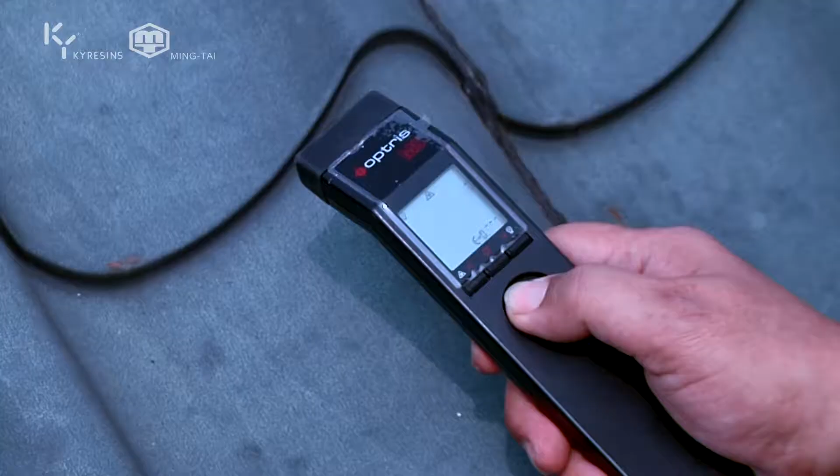Due to the attributes of urban jungles made of concrete and metal, absorbing heat in the day and radiating it at night, room temperatures usually stay high even after sunset. Therefore, city residents rely on air conditioning for a comfortable room temperature, hence the rise in electricity bills.

Moreover, the changes in environmental temperatures also consequently cause building cracks, corrosion, or efflorescence of leaking walls due to thermal contractions and expansions of building material.

Therefore, KY Resins has dedicated more than a decade since the year 2000 to the research of heat insulation paint for energy savings and carbon emissions reductions, and finally developed an environmentally friendly product, the acrylic waterborne resins. The products have been awarded many patents and certified by many countries. Meanwhile, a variety of products such as waterproof, crack-resistant, and heat insulation paint have also been developed with excellent quality that meets the highest environmental protection standards of Europe, the USA, and Japan.

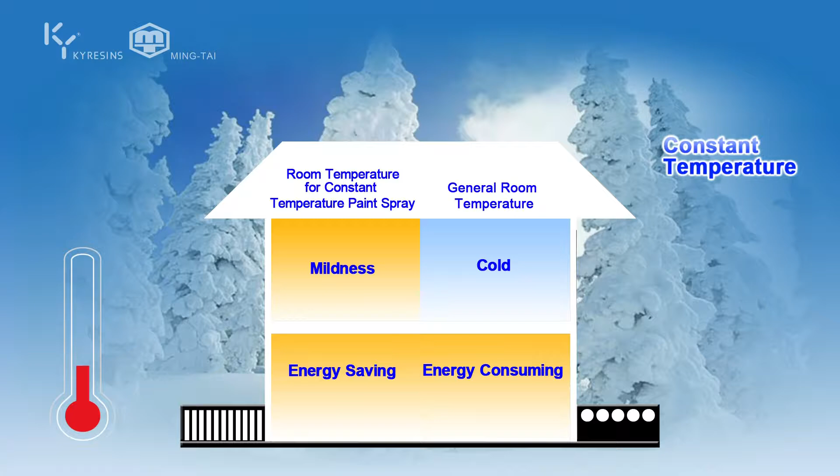KY Patent Constant Temperature Paint provides constructed buildings with protective shields of heat insulation for cooler room temperatures in summer, while warmer ones in winter.

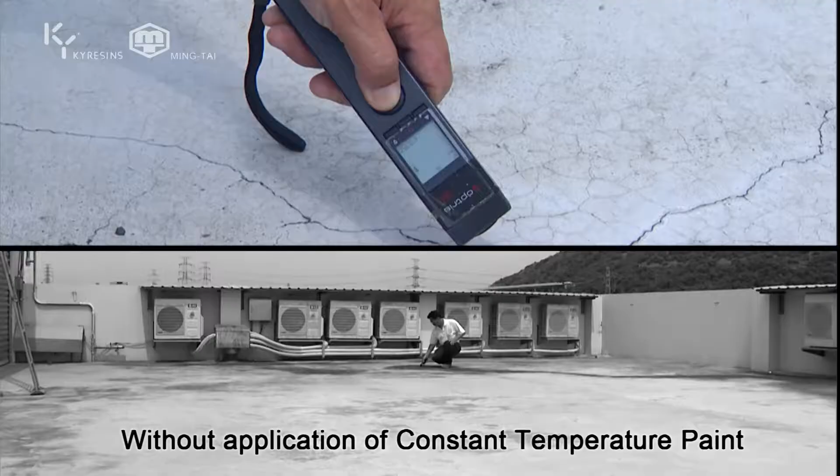For the temperature test under circumstances of ordinary summer afternoons, the temperature of 33 degrees centigrade measured on the coating of KY Patent Constant Temperature paint showed a drop of more than 20 degrees centigrade compared with the high temperature of 60 degrees centigrade before application.

KY crack-resistant waterproof structure system is a safe and reliable solution to the long-lasting problems of water leaking, cracks, and mildew on walls.

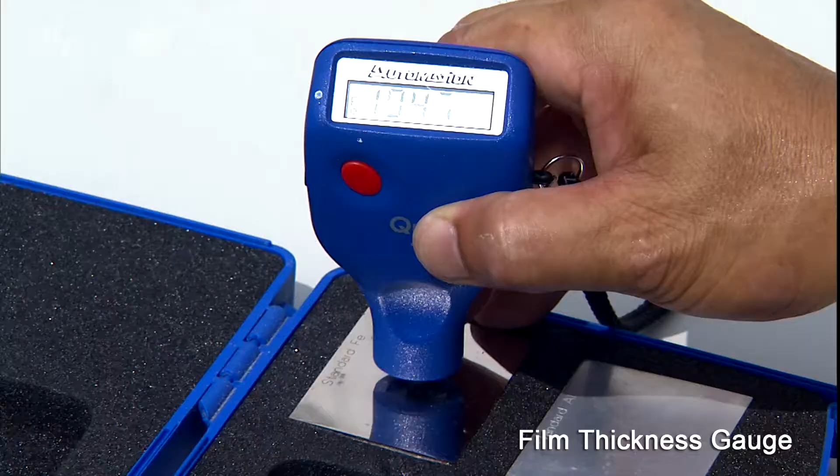KY Metal Constant Temperature Paint Cargo Test. KY Resins Company Limited especially commissioned the Plastic Industry Development Center and SGS for a series of safety tests and inspections on KY Patent Constant Temperature paint to study the effects of constant temperature control as well as energy savings.

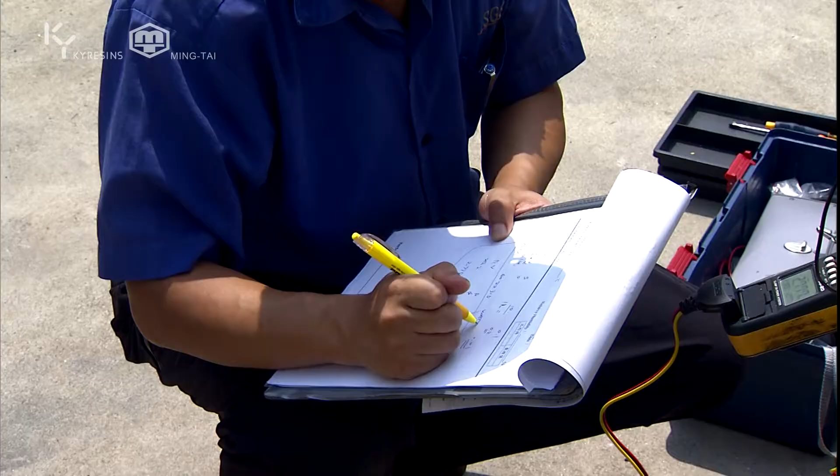Four 20-foot cargo containers were first placed on the concrete ground at the same time and labeled Cargo A, B, C, and D, whereas Cargo A and B were equipped with 4.5T single-split type air conditioners.

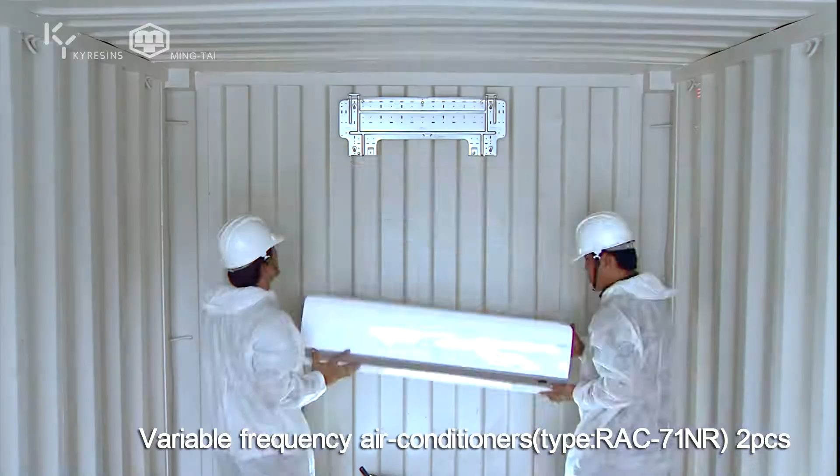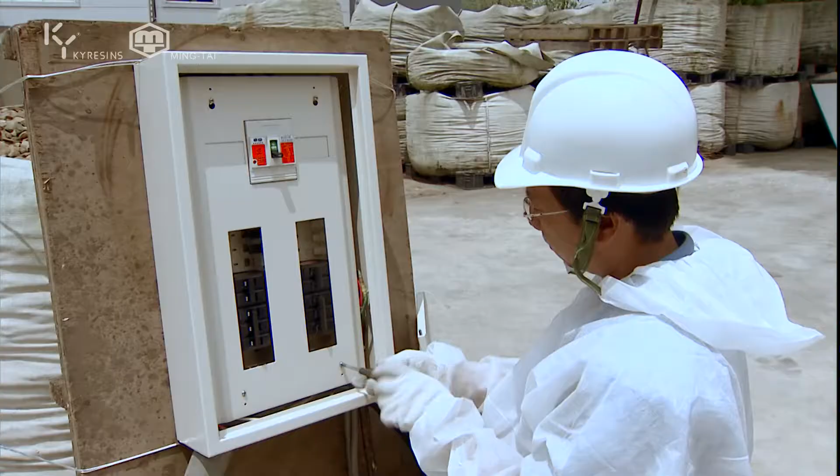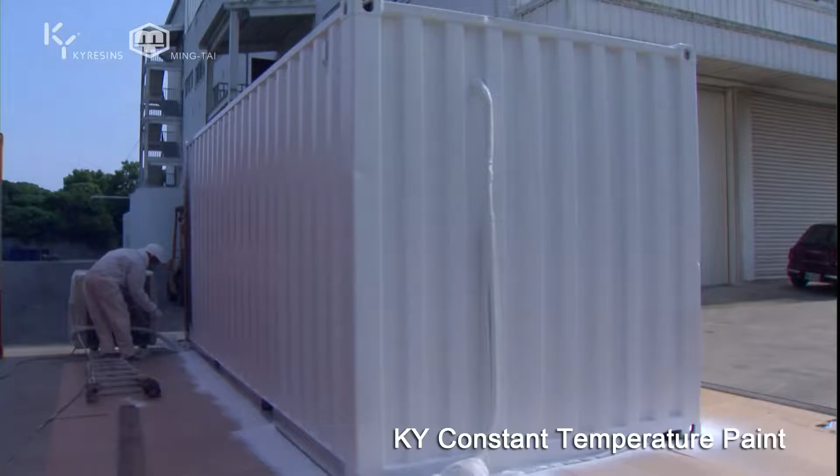KY Patent Constant Temperature paint was later applied on the outer surfaces of Cargo A and C, for tests of temperature and air conditioning power consumption, with corrected multi-point temperature recorders and current recorders during the following month.

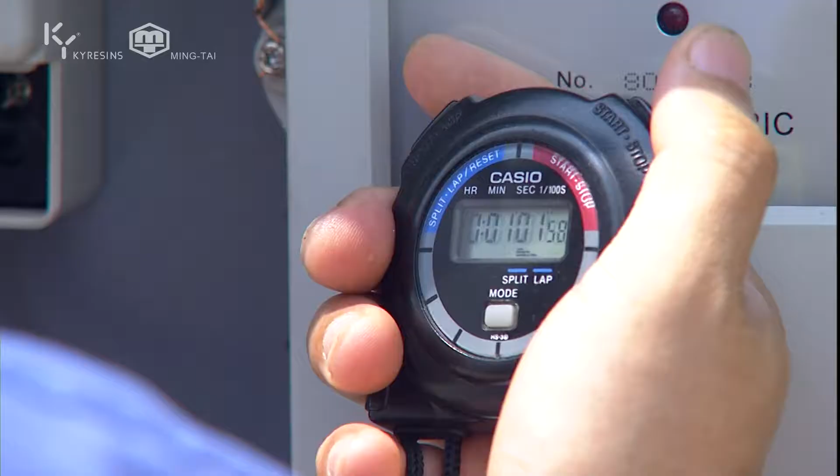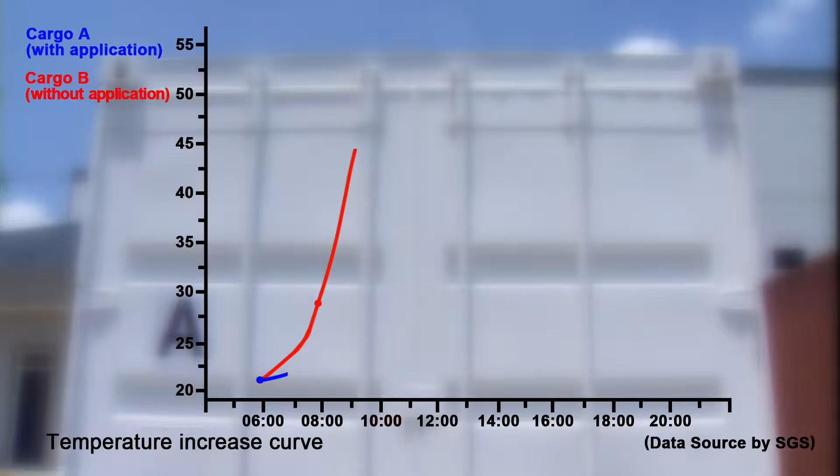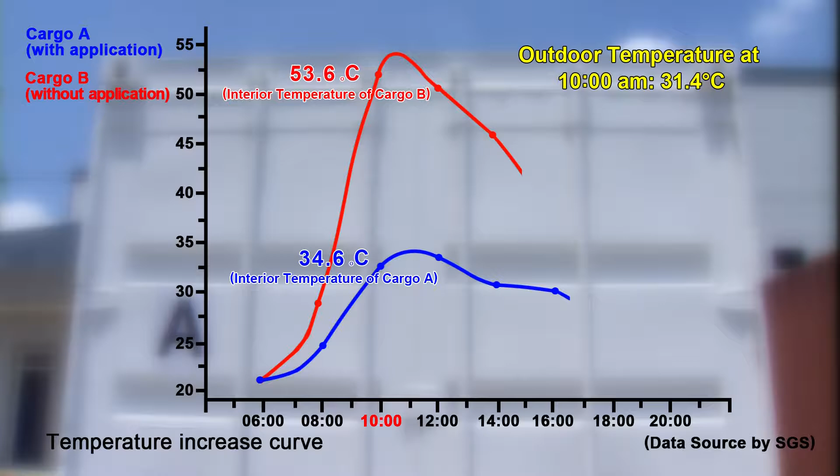According to the experiment, the four cargo containers tended to have equal temperature readings at 6 a.m. before sunrise. However, the interior temperature of Cargo B had reached 53.6 centigrade at 10 a.m., while the outdoor temperature was 31.4 degrees centigrade, whereas Cargo A in the control group revealed a temperature of 34.6 degrees centigrade, with a magnificent difference of 19 degrees centigrade.

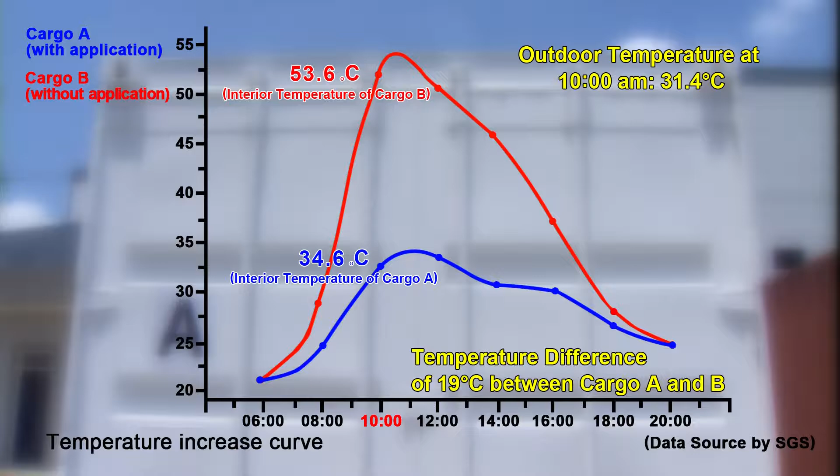At 6 p.m., the interior temperature of Cargo A had come to the same reading as the outdoor temperature, while it was 8 p.m. for Cargo B.

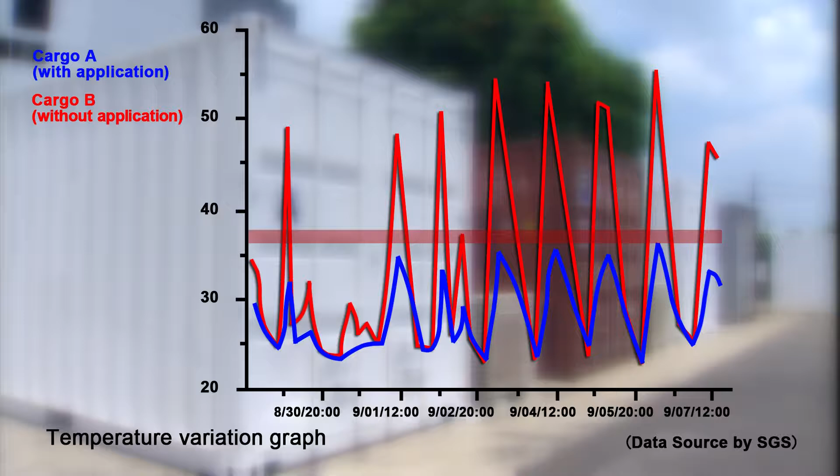Under circumstances of a 9-day temperature observation with no air conditioning, Cargo B without coating appeared to be the one with the most temperature difference of 25 degrees centigrade between day and night, whereas under direct sunlight without any shade, Cargo B without coating tended to have significant temperature differences of 15 to 20 degrees centigrade compared with Cargo A with coatings.

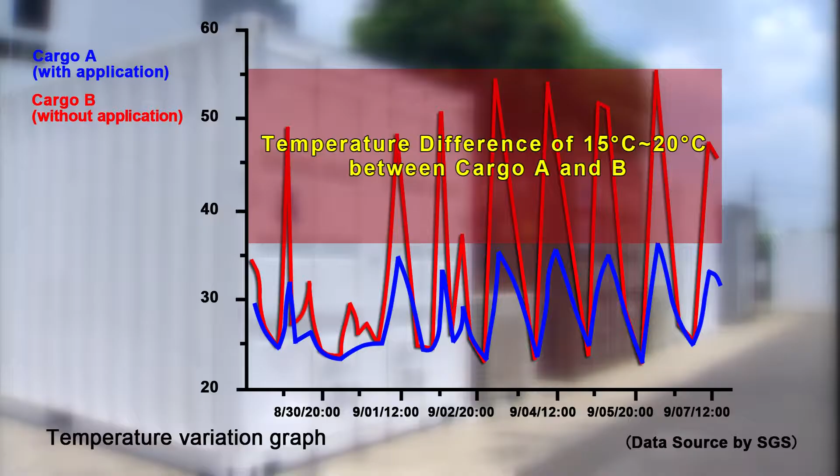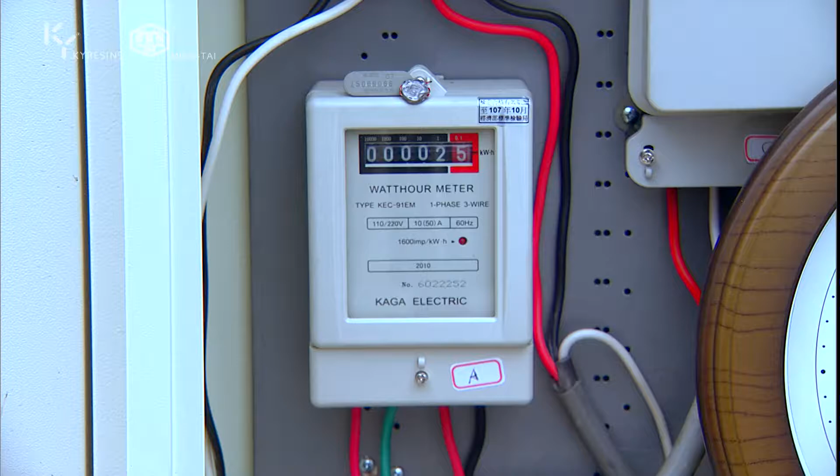Air conditioning power consumption: under the circumstances of a set temperature of 25 degrees Celsius for air conditioning, the start temperature at Cargo A was 2.43 degrees, while Cargo B was 3.64 degrees. There was a variance of 223.3 kilowatt-hours between Cargo A and B for the 21-day accumulated power consumption, equaling 53.1 kilowatt-hours per ping.

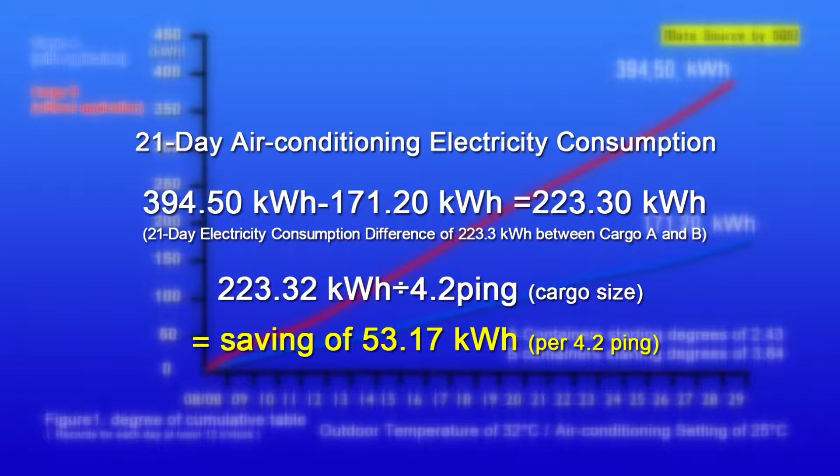The size of one cargo is approximately 4.2 ping. After the calculations, Cargo A with an application of KY patent constant temperature paint had not only enhanced the air conditioning efficiency, but also saved 60% of electricity.

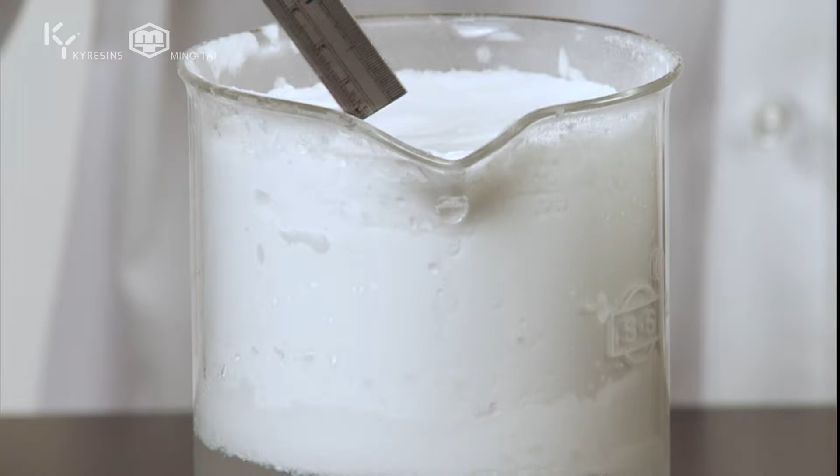The heat insulation effect of our constant temperature paint product largely depends on the insulation material of hollow balls inside, which interact with air. These hollow balls are 30 times lighter than water and weigh almost as little as air.

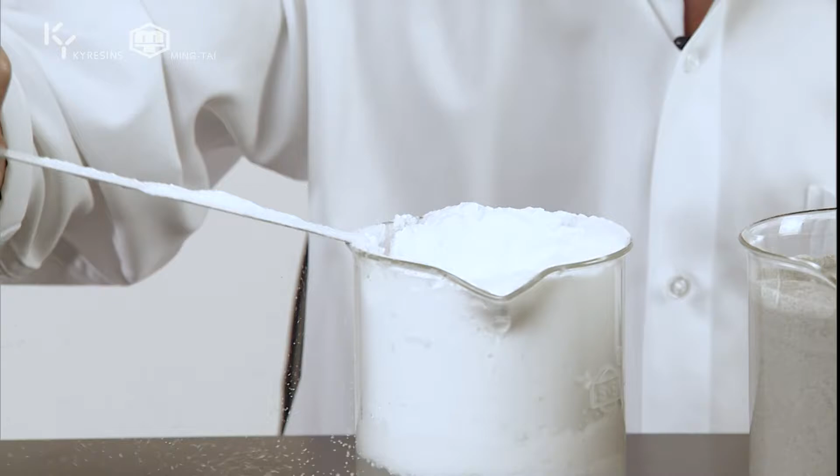Compared with the market-available hollow ceramics that weigh 1/3 of water and are 10 times heavier than our patent hollow balls, the heat insulation effect of our patent hollow balls has achieved a successful temperature drop of 5 degrees centigrade more than hollow ceramics, and 10 degrees centigrade more than pure white paint.

The hollow balls are our key materials for heat insulation, and they are composed of such fine textures that you do not feel anything when touching them.

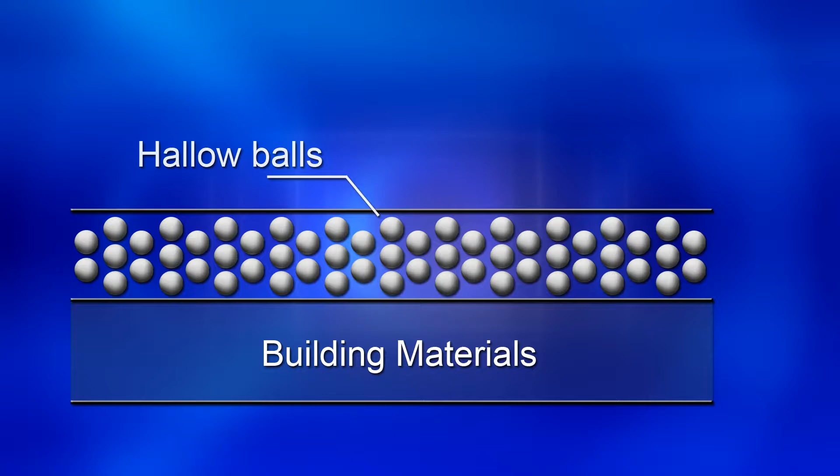KY patent constant temperature paint employs the static air inside the hollow balls for heat insulation, as well as KY patent resins for the best performance of water and weather resistance, in addition to low heat conductivity.

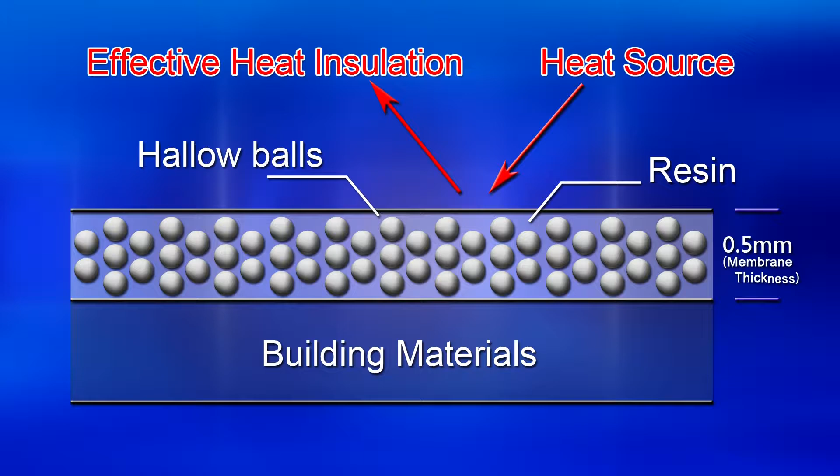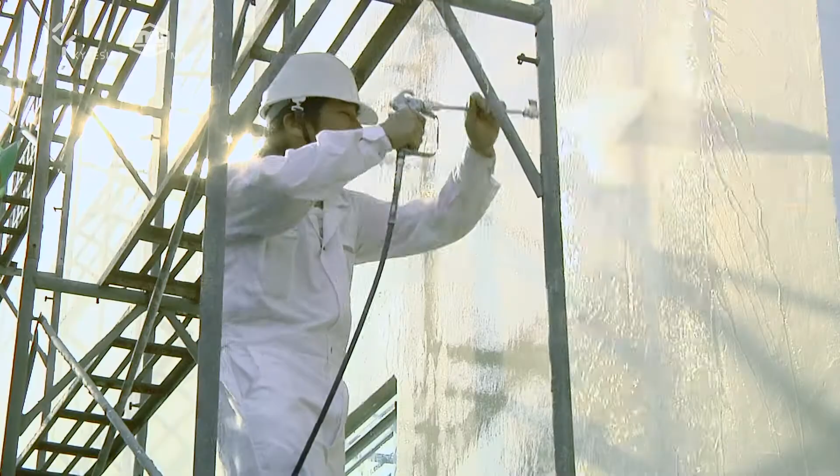Waterproof constant temperature paint for RC roof and wall application instructions. The application of KY constant temperature paint on RC construction is the same as traditional waterproofing construction, following 4 steps. First, clean the moss and stains off the ground and walls with high-pressure water jets.

Apply RC structure primer evenly on the surfaces.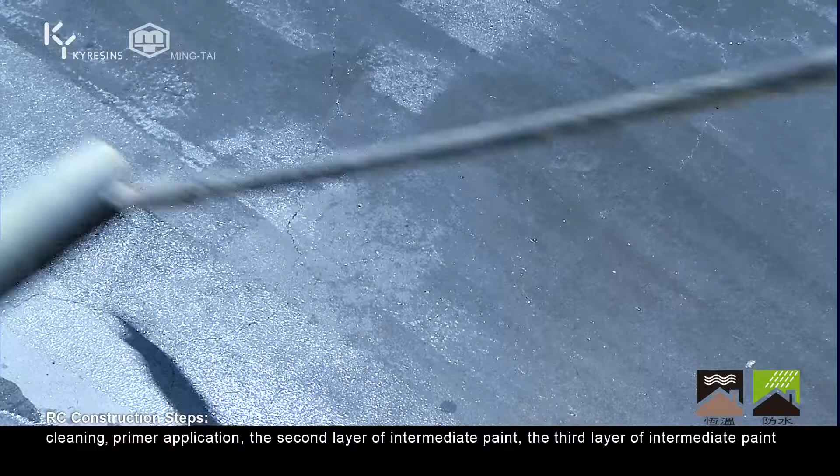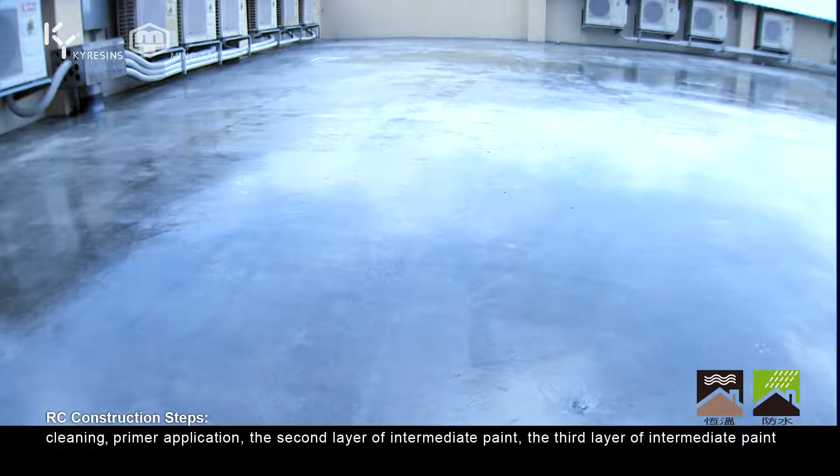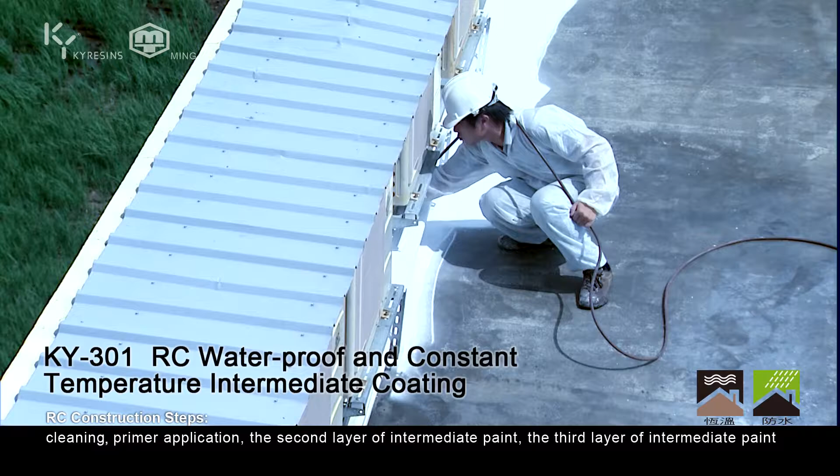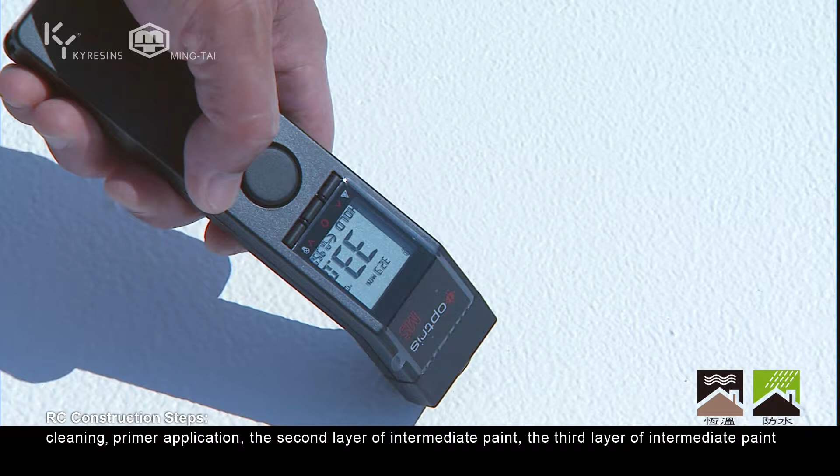After 1 hour of drying, apply RC waterproof and constant temperature intermediate coating evenly on the surfaces. After hardening, apply the second and third intermediate coatings, and finally apply evenly with patent constant temperature paint. Wait another 30 to 60 minutes for complete hardening after applications to accomplish the super effects of temperature control, heat insulation, humidity resistance, waterproofing, and dew-proofing.

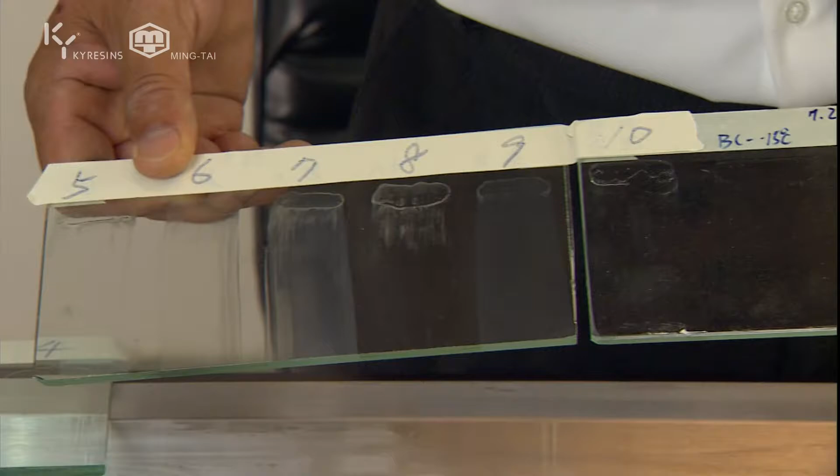Waterproof water resistance test. Believe it or not, most of the waterproof paint or heat insulation paint available in markets all leak, more or less. To see it is to believe it. Let's witness the following experiment. Let's apply all kinds of waterproof paint available in markets according to the instructions for surface waterproof tests and membrane water containing experiments.

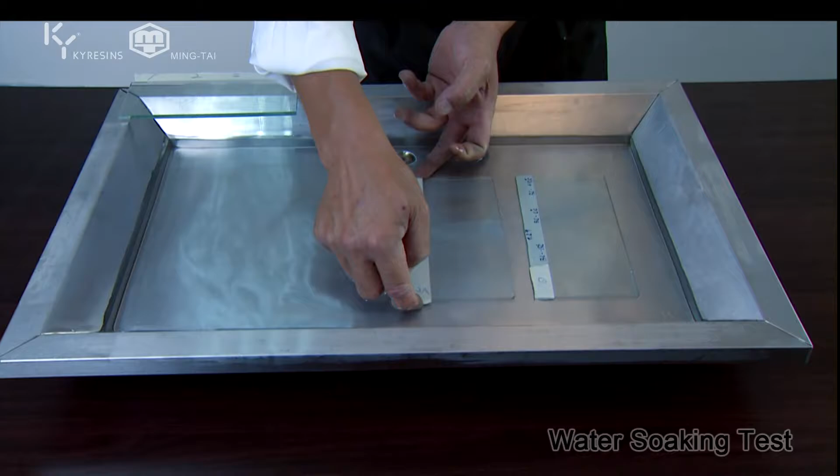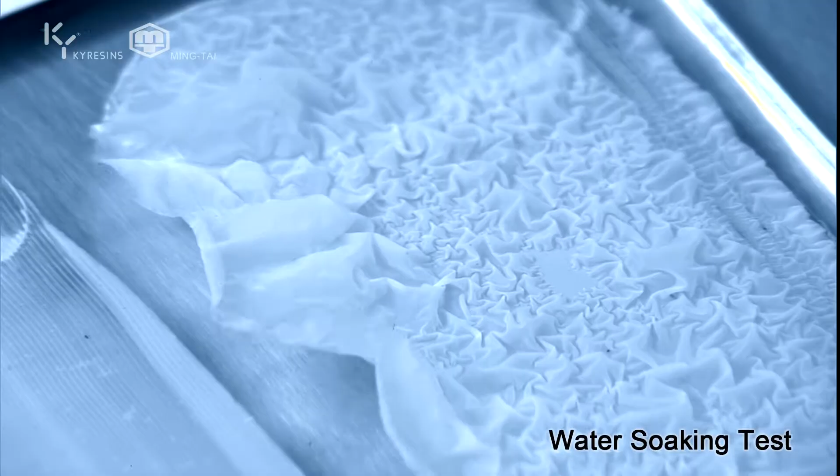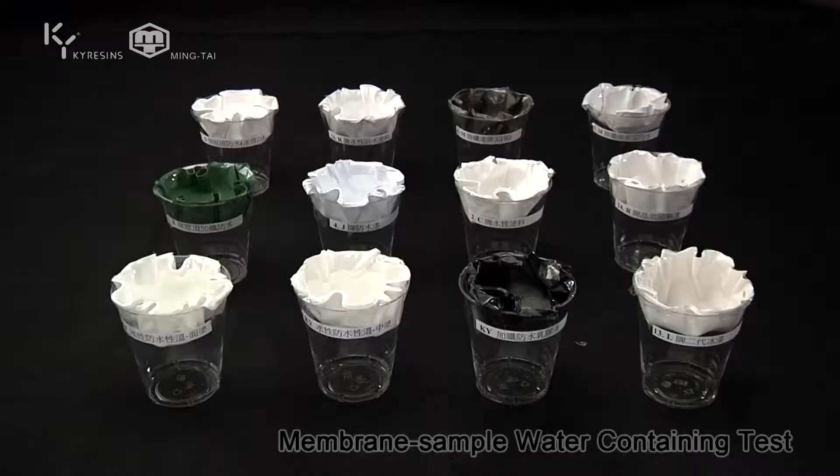Experiment 2. Apply and wait for the paint to dry to form membranes. Place the membranes on containers and pour on the same volume of water as a simulation of ponding water on buildings.

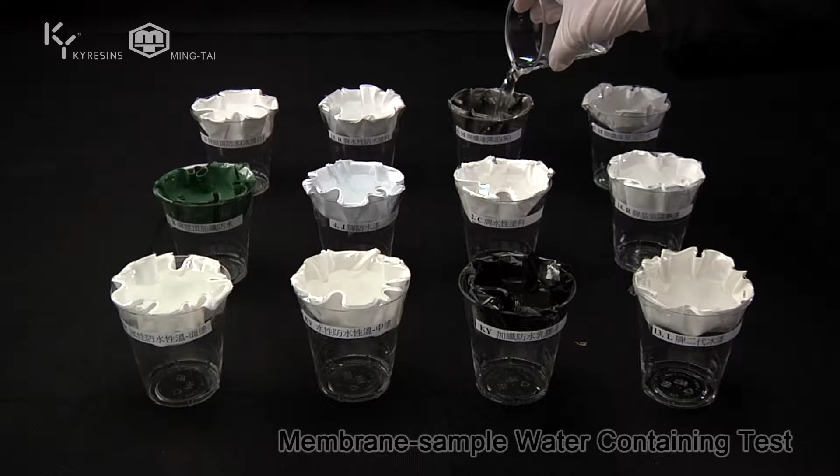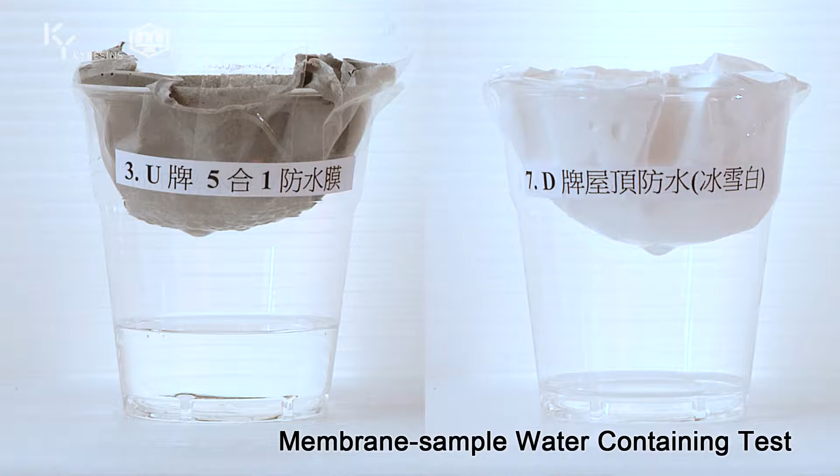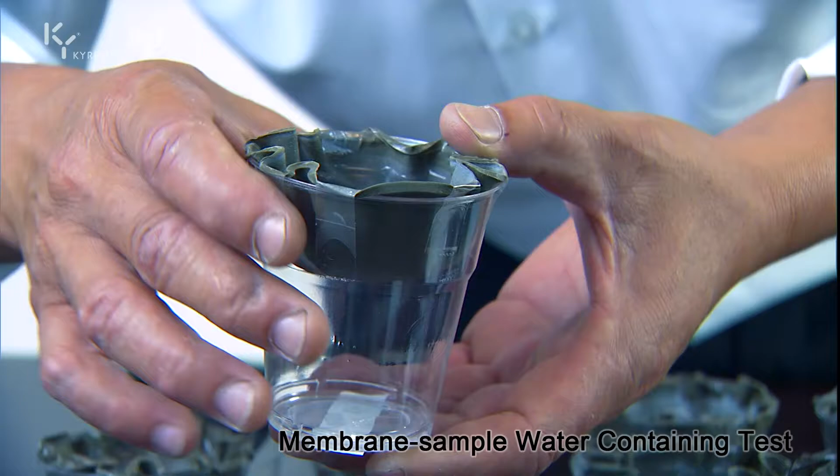The water-containing samples had dissolved when paint membranes melt out the alkaline substances. Some serious ones had even dripped. After 24 hours of soaking, most of the waterproof paint had water penetration down to the container bottoms due to the component of emulsifiers, even though the membranes had not broken. That is why most of the waterproof paint were not really water resistant.

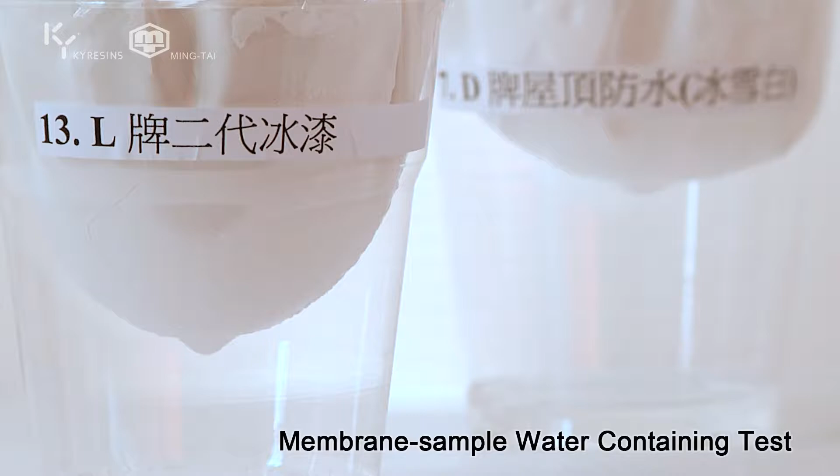Only KY patent waterproof paint and patent constant temperature paint passed the harsh tests with the super effects of water resistance and deterioration free.

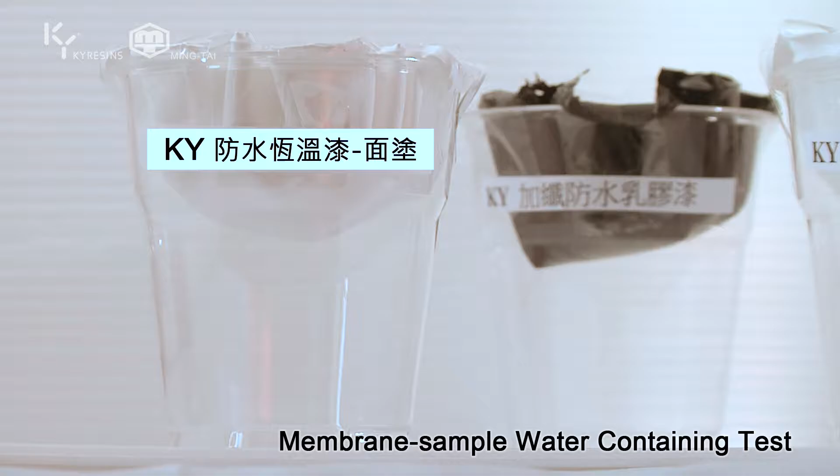Introduction of special paint for indoor and outdoor roofs, exterior walls, and bathrooms. KY RC Structure Primer is featured with good penetration to building foundations for complete structuration of concrete layer and coating adhesion. KY Fiber Waterproof Emulsion Paint is especially made for waterproofing engineering prior to tile decorations, available for all kinds of roofs, balcony, bathrooms, kitchens, and roof gardens. The product is featured with excellent effects of stretching resistance and extension, as well as waterproofing, leak-proofing, cement aging resistance.

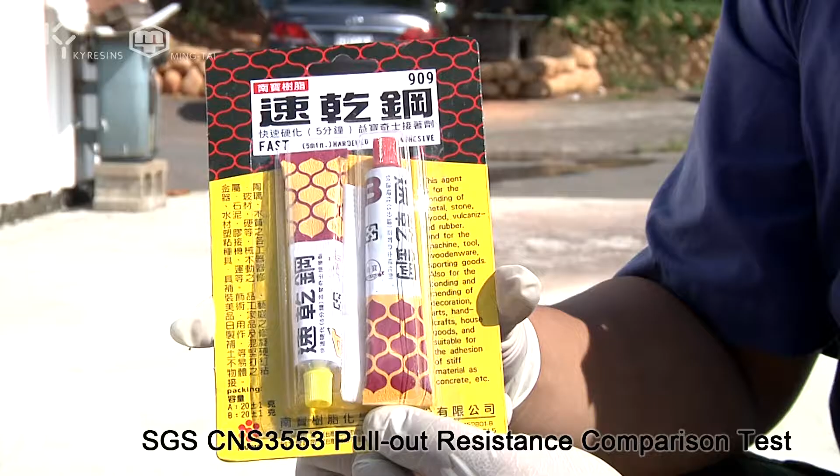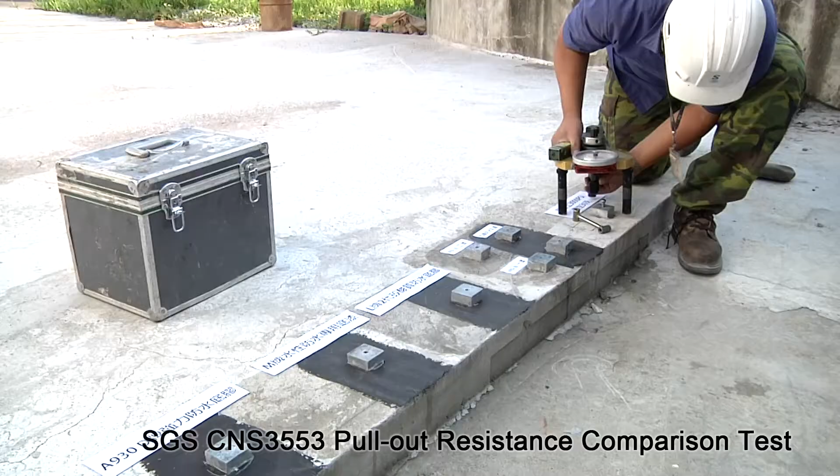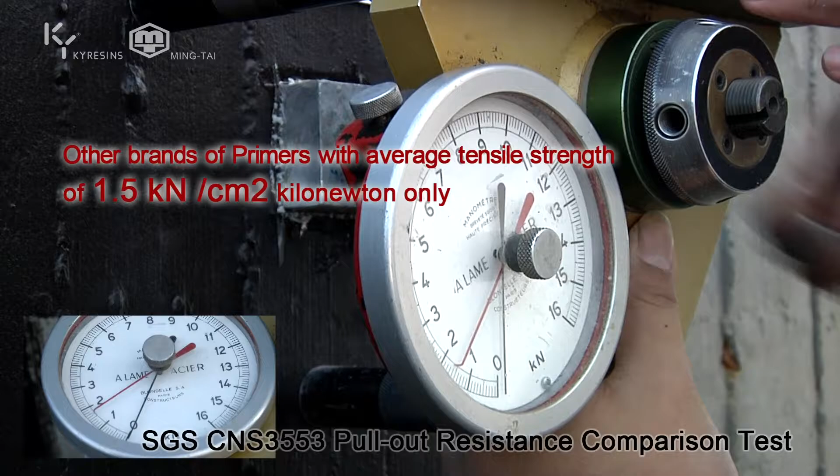RC Structure Primer Fiber Waterproof Emulsion Paint Pull-Out Test. According to the pull-out test by SGS in compliance with CNS 3553 standards, most of the waterproof materials and primers available in markets only had average tensile strength of 1.5 kN per centimeter squared kilonewton, whereas the dust and stains on the surface coatings would affect the second phase construction structures.

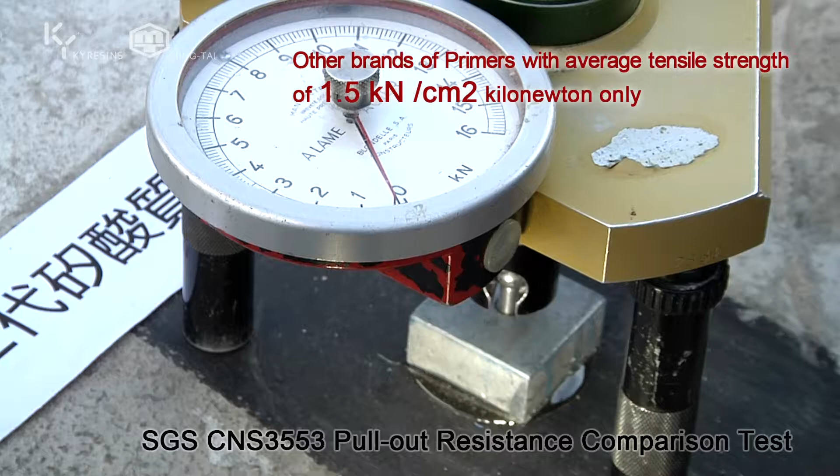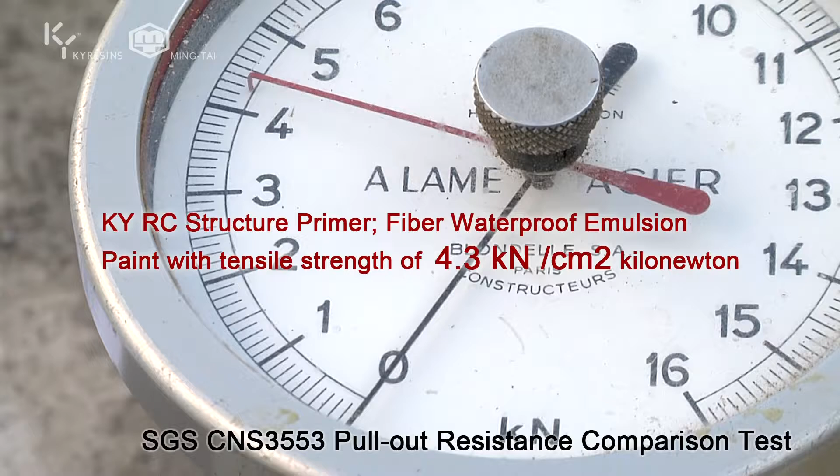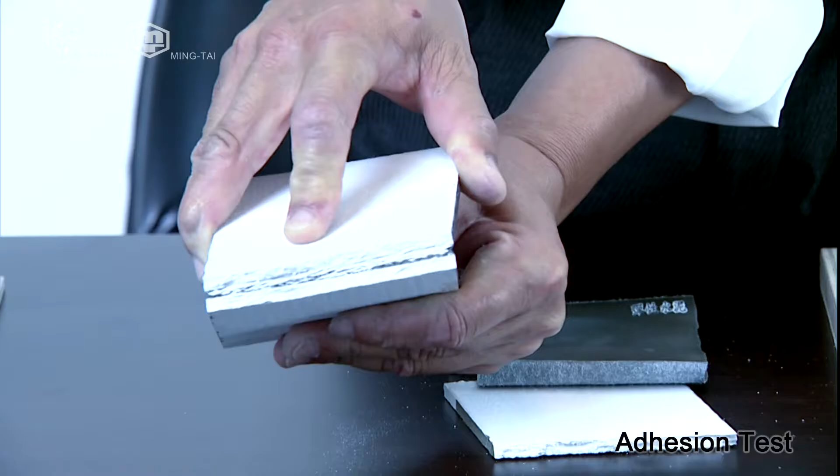However, KY RC Structure Primer and Fiber Waterproof Emulsion Paint stood out with an excellent tensile strength of 4.3 kN per centimeter squared kilonewton. Such excellent adhesions are great solutions to cracking, peeling, and leaking of terrazzo and tile walls due to their insufficient adhesions with coatings caused by cement dust and stains.

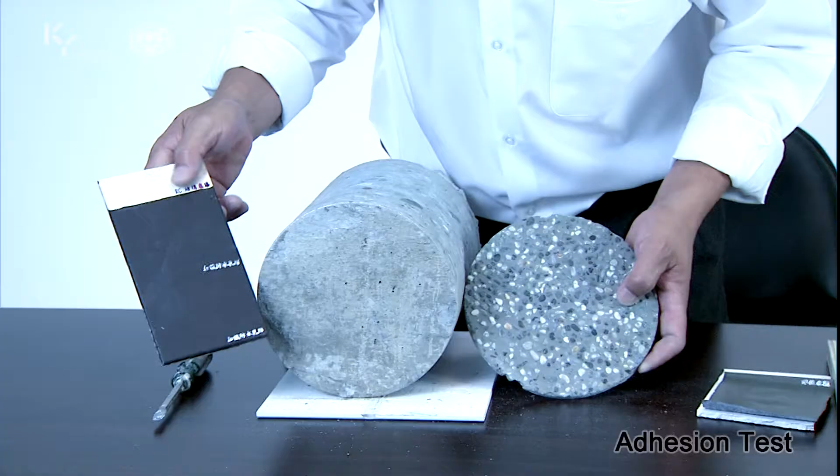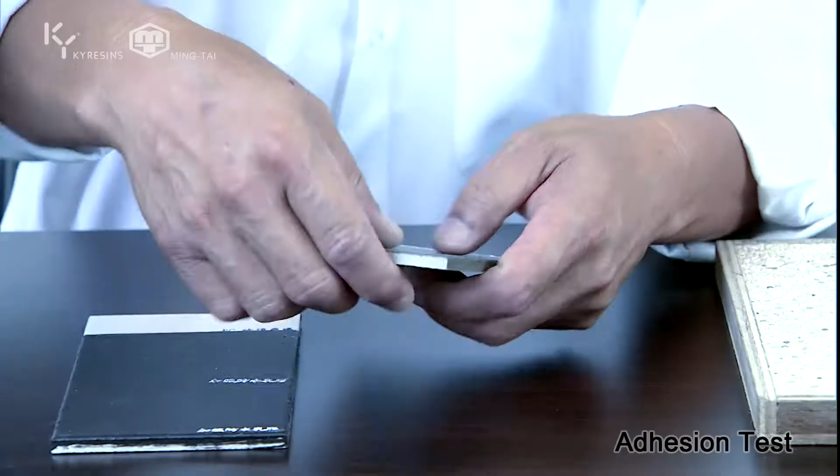The design adhesion of KY constant temperature paint is said to be 10 kilograms per centimeter squared, as 3.1 T for a circle area with a diameter of 20 centimeters. For other brands of paint, the paint might have been easily pulled off entirely with a force of less than 1 kilogram.

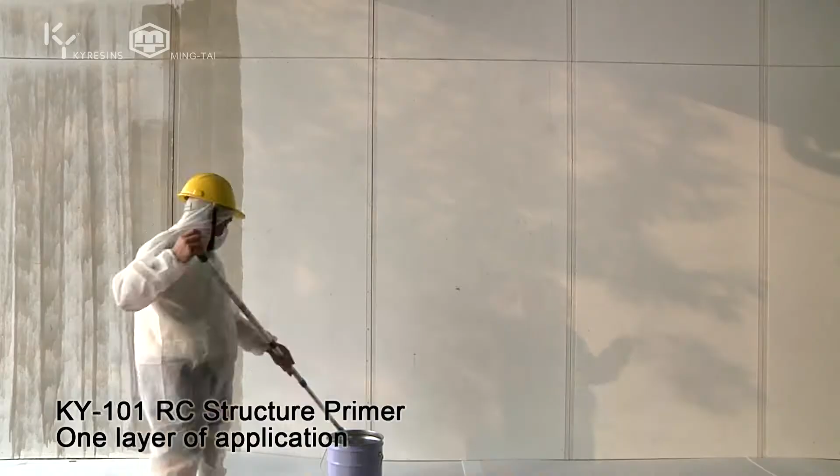Introduction of RC Crack Control Structure System, Expansion Joint Construction, and Interior Panel Construction. Clean up the wall and spray with RC Structure Primer. After drying, fill the gaps with yield resistance clay plaster evenly by pressing the strike-off board twice.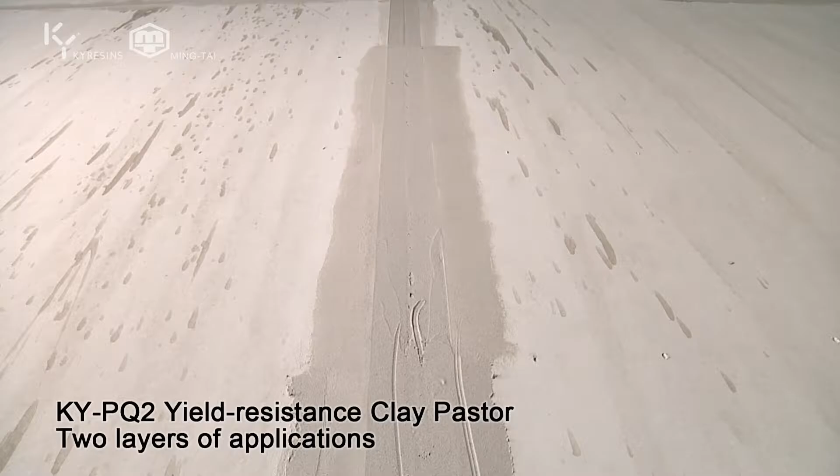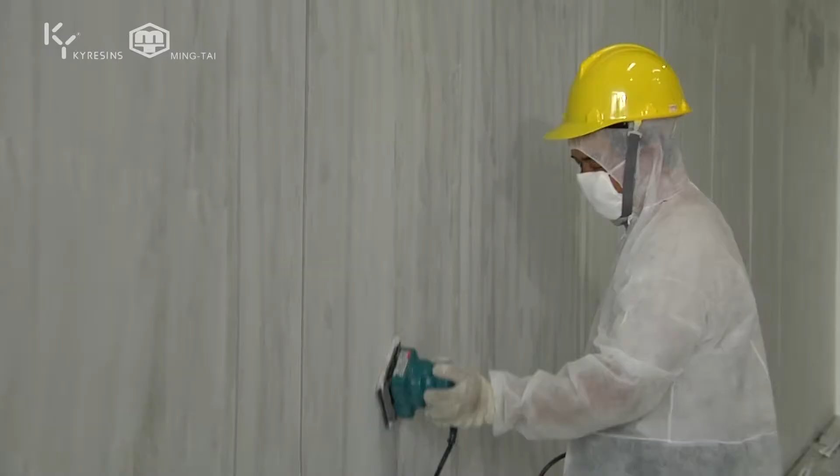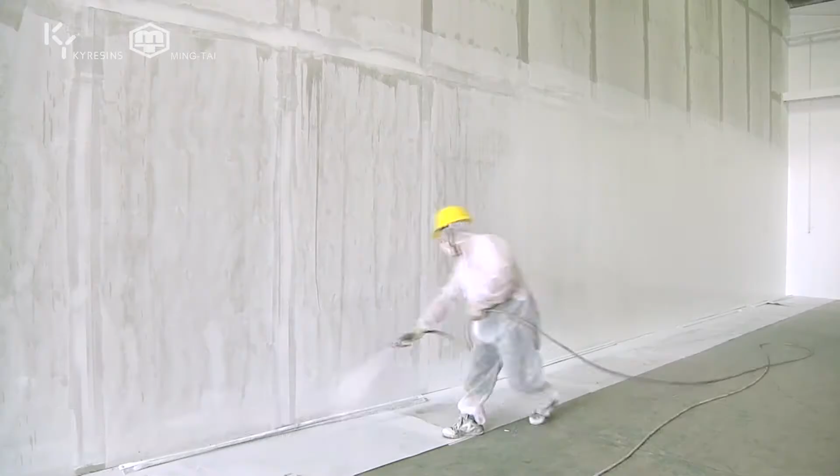After drying, apply the flexible clay plaster evenly on the entire wall to refine the pores for better evenness. Spray RC crack resistant structure primer evenly on the wall twice after 1 hour of drying. After drying, spray with the indoor and outdoor emulsion paint. The perfect wall of crack-resistant, strong extension, waterproof and stain-proof then was done upon accomplishment of the 7 steps.

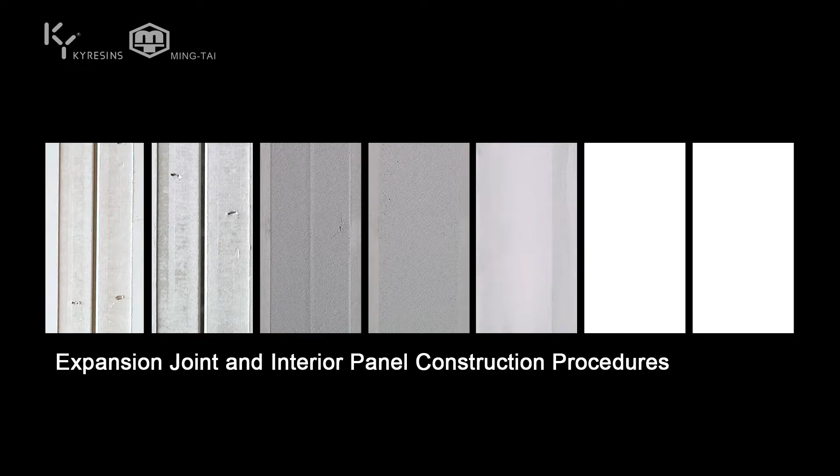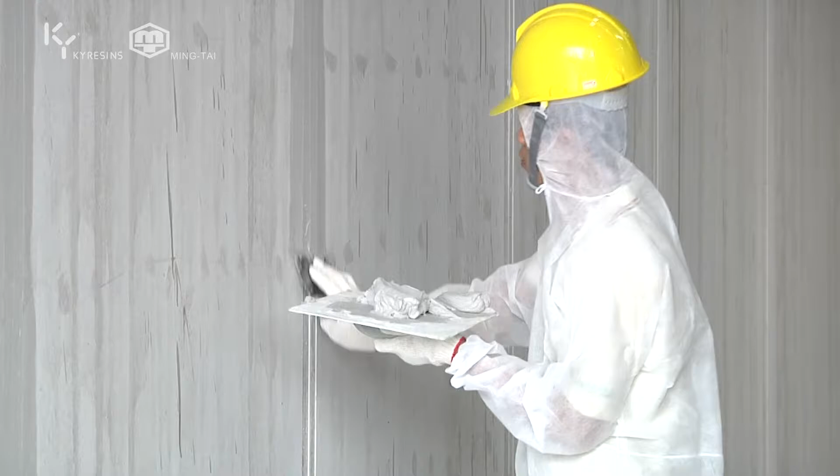Expansion Joint Solution. KYPQ2 Yield-Resistant Clay Plaster. Paint application on RC construction or partition walls used to be vulnerable to cracks or gaps due to cement expansion and contraction as well as earthquakes. However, the application of KY yield-resistant clay plaster 1mm modification formula and RC crack-resistant structure system may be the effective solution to cracking problems.

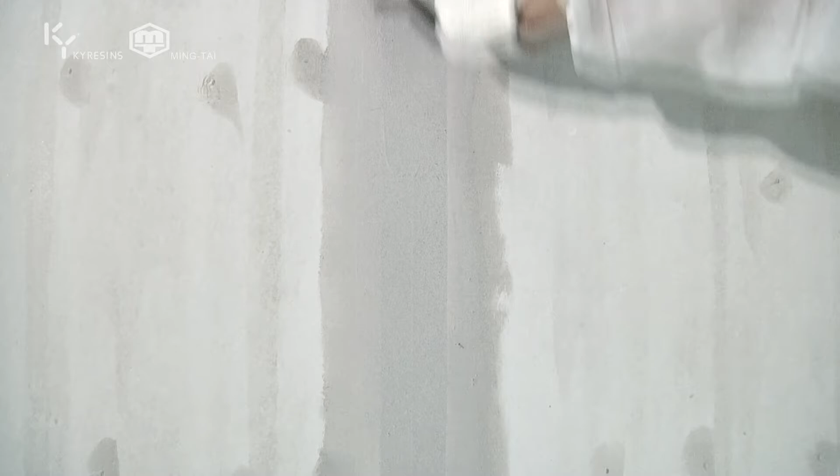Experiment. Test for RC crack-resistant structure system, expansion joint construction, and indoor panels. When bending the building materials over 150 degrees, there were only cracks on the clay plasters, whereas no cracks and no modifications at all for the 7 layers of applications.

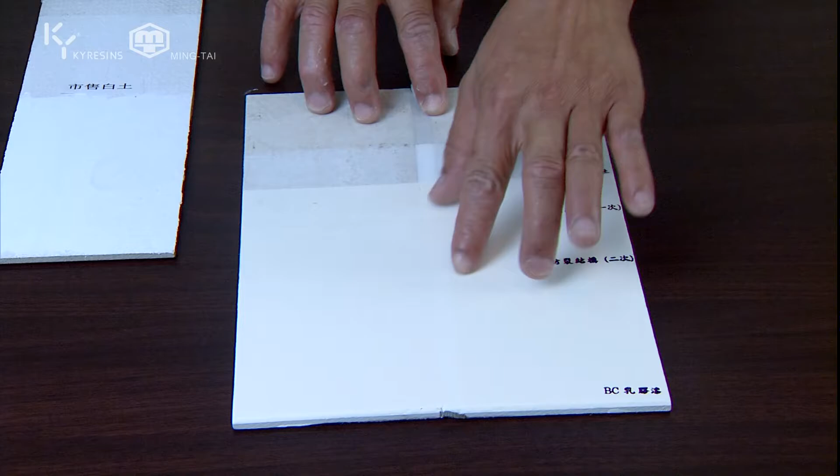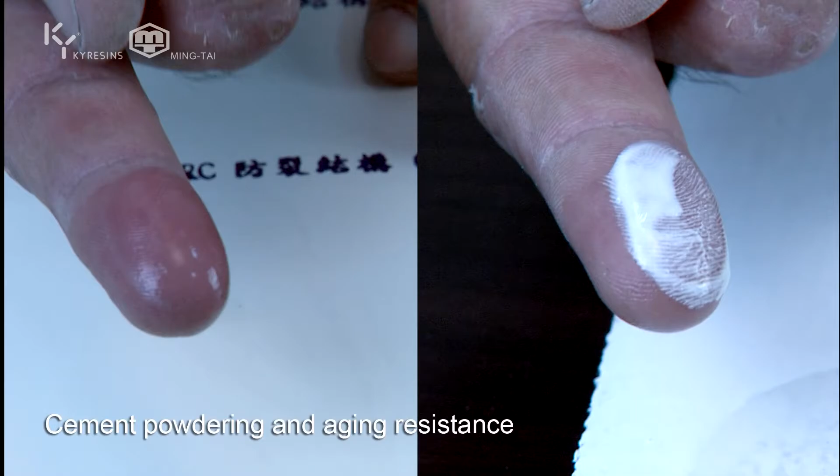Natural stone facade refurbishment. With the application of KY natural stones, there is no longer a need for tearing off the existing tiles of external walls or bathrooms when waterproofing or refurbishing. It takes just a few steps to restore the surface evenness with the effects of natural stone looks and waterproofing.

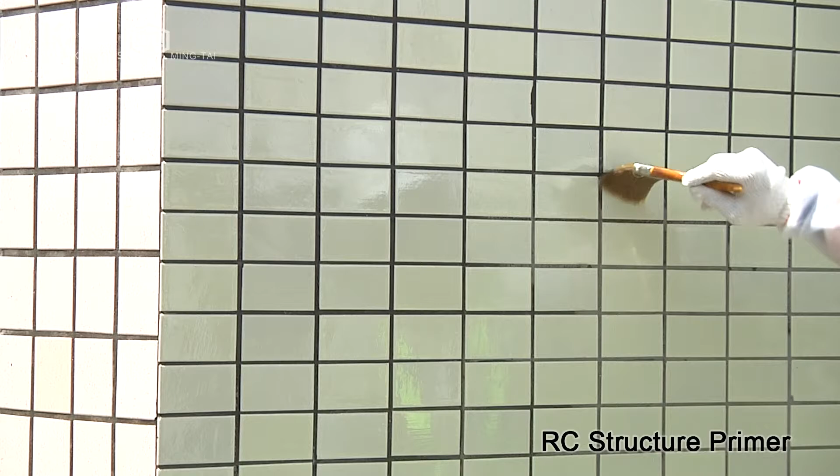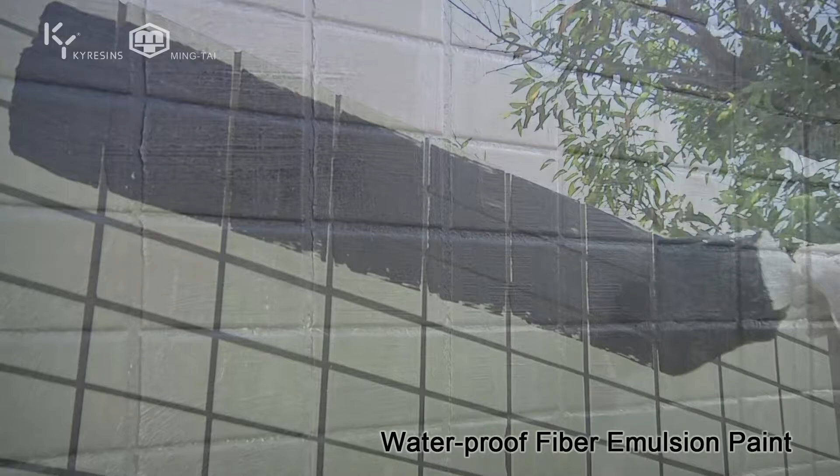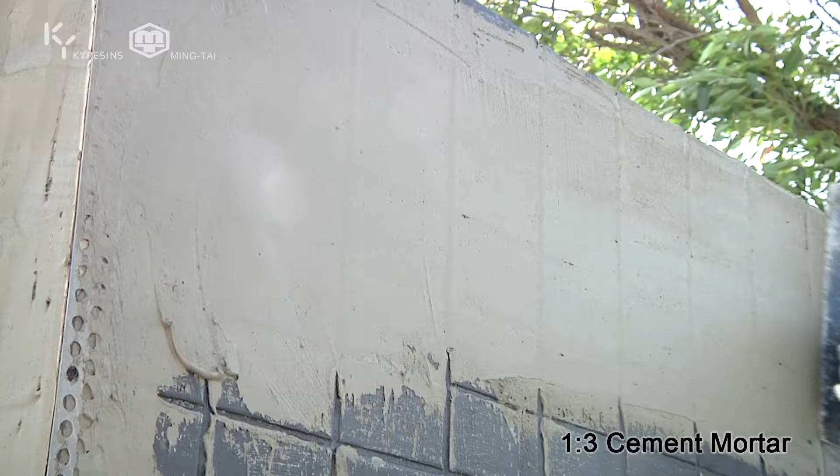Firstly, wash the tile wall clean with high-pressure water jet to see if there is any damaged holes or hollows. Fill the tile gaps with cement. After drying, apply RC structure primer evenly on the tile surfaces and the concrete gaps. After drying, apply KY fiber waterproof emulsion paint. After drying, fill the gaps with 1 to 3 cement mortars.

After hardening, apply KY patent constant temperature intermediate paint. After drying, apply the natural stones evenly on the walls with trowels. Finally, apply stain-free clear lacquer after drying.

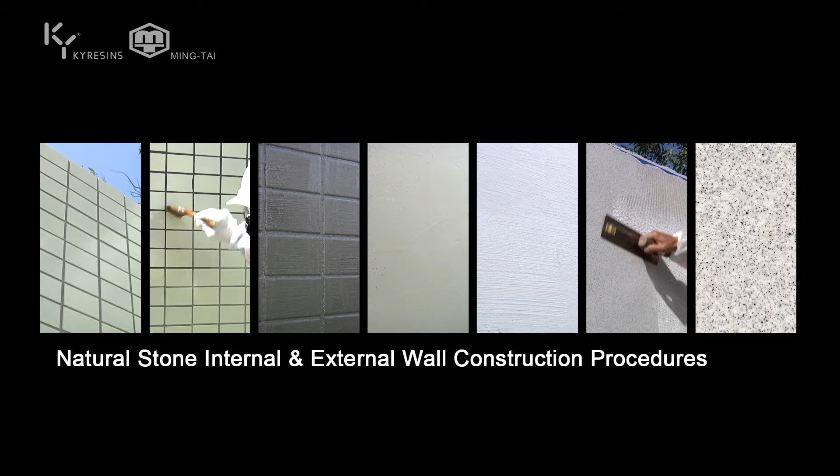The tearing down of tile walls and the leaking problems of indoor and outdoor walls as well as bathrooms can then be solved with the 7 steps mentioned above. A high-quality natural stone wall with the effects of waterproofing, constant temperature, crack-free and stain-free will then be done.

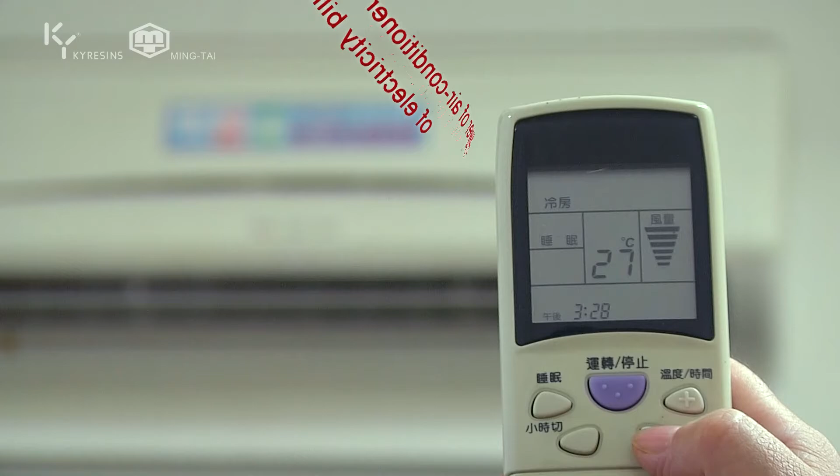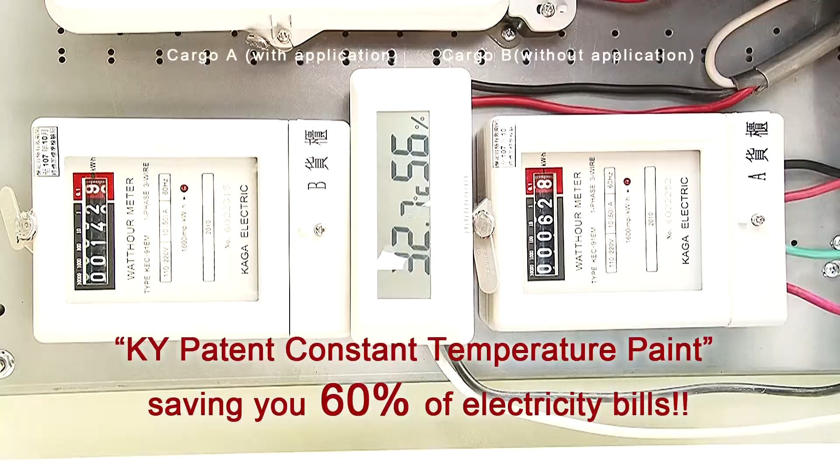1 degree centigrade lower air conditioning setting means 6% more of electricity bills. KY patent constant temperature paint saves you 60% of electricity bills, and will cool down your room temperature with a drop of more than 10 degrees centigrade. Loving Earth, energy saving, and carbon emission reduction should be more than slogans. Let's begin with loving our homes together.